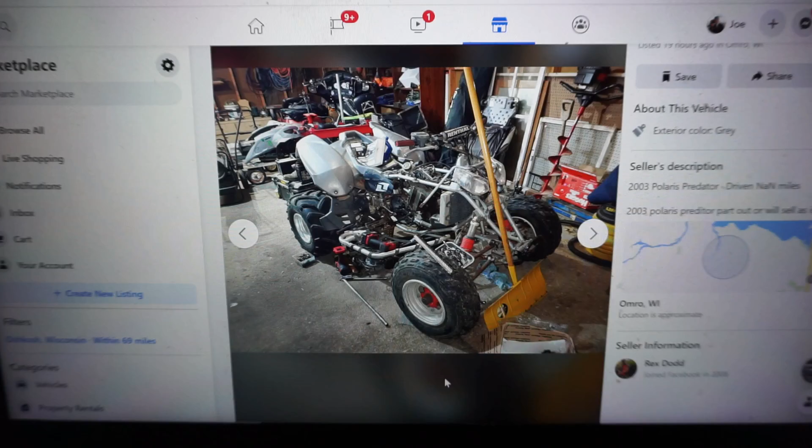This was up for a project. I just called the guy, and he said he'd take $800 for it. He gave me the rundown - basically he said he could not get it to fire. It turns over, has compression, and has spark, but he just cannot get it to fire. He thinks it's the timing. So we're gonna go check it out, see if it's worth buying, and give him the $800 if it all looks decent.

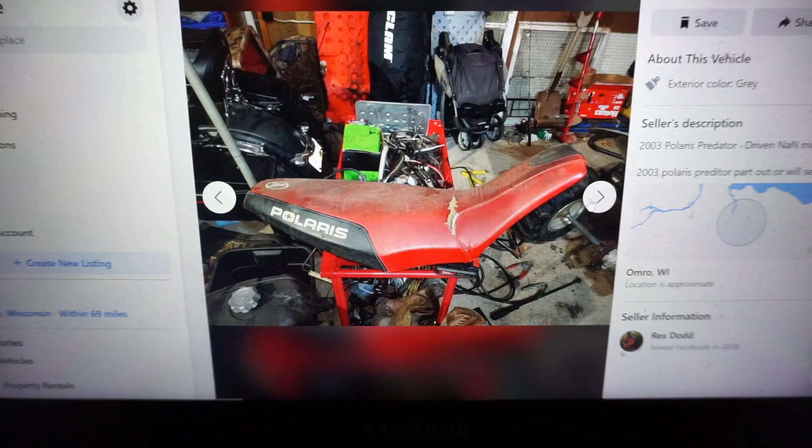You can see going through the pictures, it looks like it's all there. You can see he's got the clutch side off for some reason. There's an aftermarket exhaust on there, pretty nice one too. There's the seat for it - you can see it's kind of clapped out, but $800 is $800, we can work with that. And there's all the plastics for it.

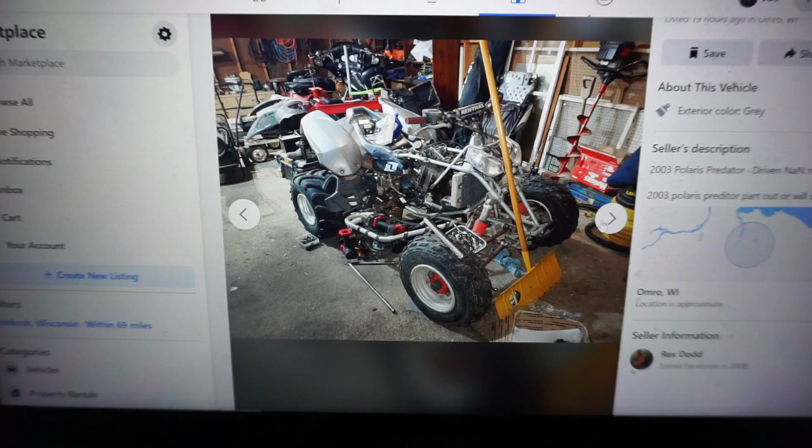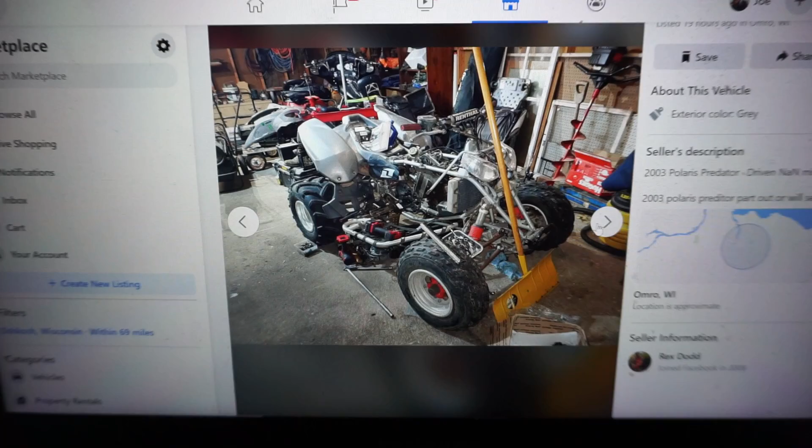So let's hit the road. It's right in Omro, so it's only like 20 minutes away from my house, which is perfect. We'll go pick her up and start working on it, see if we can get this thing fired up. I'm pretty pumped - usually these quads go for like $2,750, so we'll see if we can get it for $800. Stay tuned, should be a pretty fun project.

All right, the beast is back home. It was getting dark yesterday when I picked it up, so I didn't really film too much of it, but it's here, and she's a little rough, but not too bad. The guy basically told me he couldn't figure out the timing - that's what he thinks. It turns over, everything works on it, but it doesn't start. So today we're gonna be taking it apart and figuring out why it's not starting. I think it's the timing too - I think he messed up the timing, or the previous owner before him messed up the timing, and it never was right again.

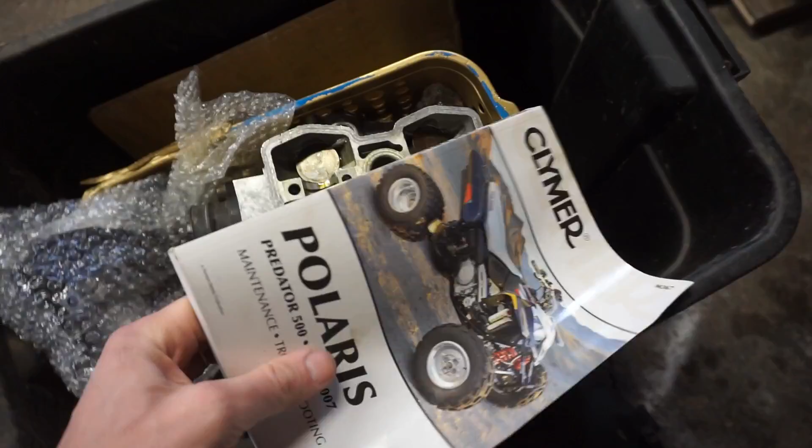These plastics are just kind of laying on here right now. The seat comes off, we'll put everything over here as a parts pile. This plastic comes off over here. Got that plastic piece off, and the gas tank just pulls right out of there like that. So it did come with the manual, and it comes with an extra head, an extra valve cover, extra cams and stuff like that, plus a couple gaskets in here. It comes with like everything to put it back together, so the pipe and everything like that.

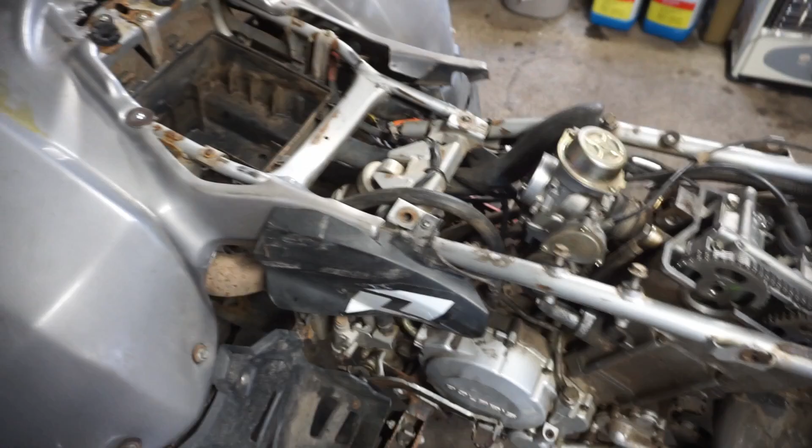It does have an aftermarket pipe on it - a Yoshimura off-road pipe. I don't know if those are any good. Let me know in the comment section if you guys run those and if they're pretty good, I'm not too sure, haven't really heard too much about them.

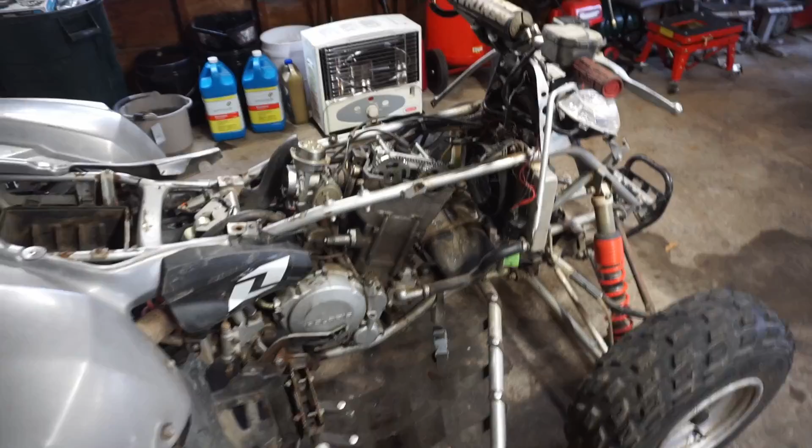We'll kind of quickly walk over the whole quad and check it out. It's got Nerf bars on it, I don't know if these are stock for it - I'm guessing they're not, not really sure what brand these are. I don't really see a brand stamped on it. They don't look like anything too fancy, but they do have them, which is nice.

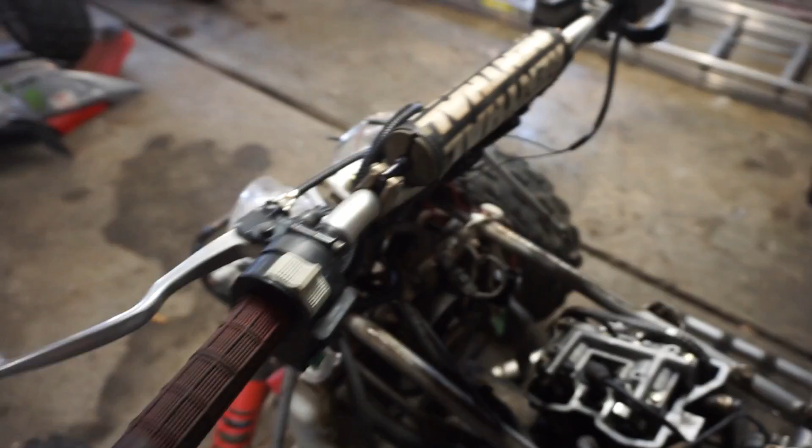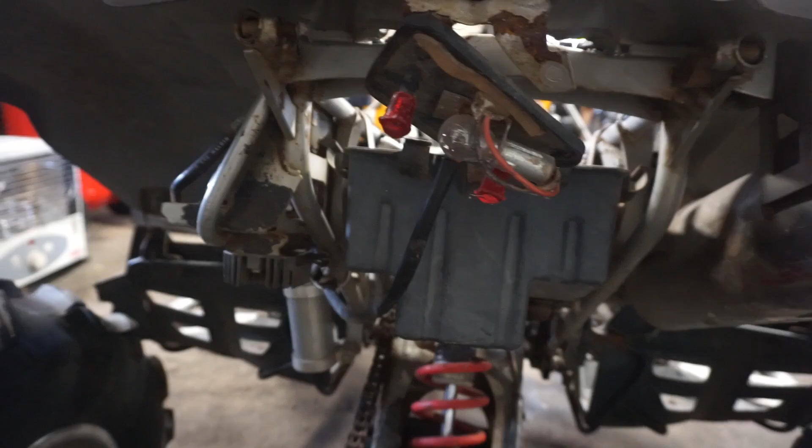It's got Renthal bars on it. I think that's basically the only updates to it. It does not have a grab bar, which is really annoying, so we'll have to get a grab bar if we can get this thing going - somebody must have taken it off or something. But the chain and sprockets are a little rusty, you can see.

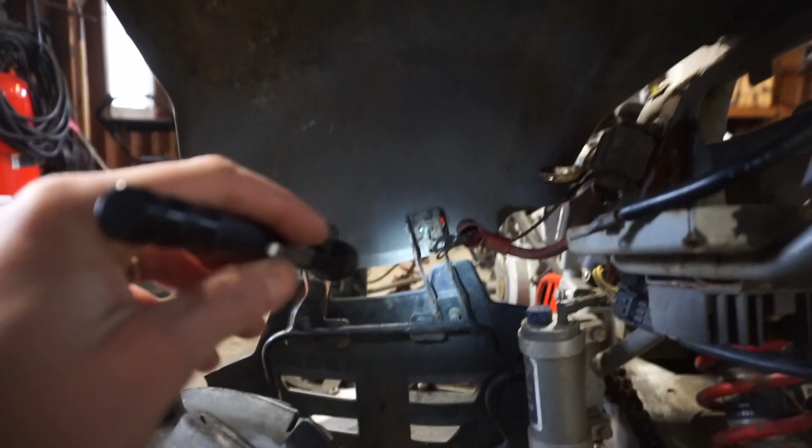We'll get the flashlight out so we can take a closer look at stuff. Chain and sprocket are really rusty. Suspension felt pretty good when I jumped on it. You can see all the plastics are kind of unbolted and everything, and yeah, the taillight's broken, so it must have crashed at one point.

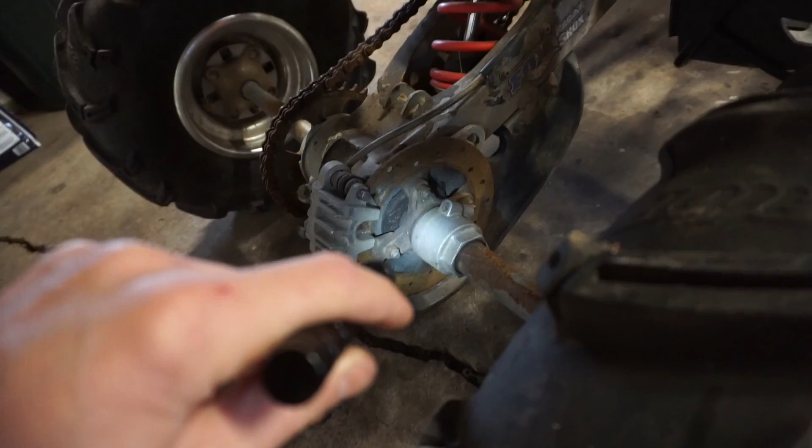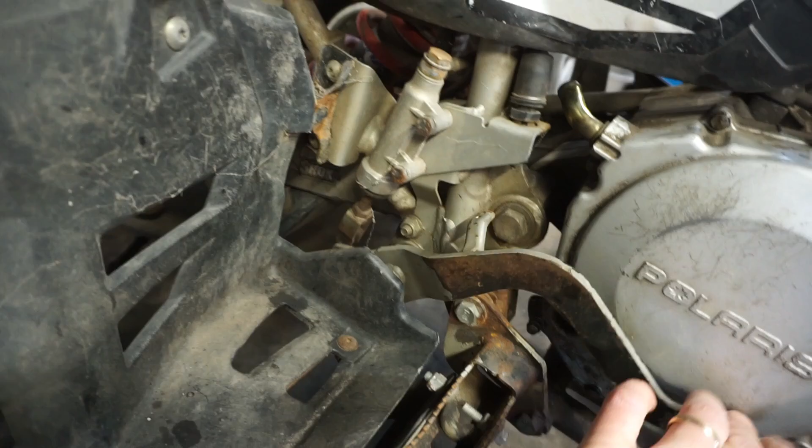Brake rotor is really rusty, got a couple rusty places on it. You can see the brake lever for the back - I don't know where... oh, that's... okay, that's working.

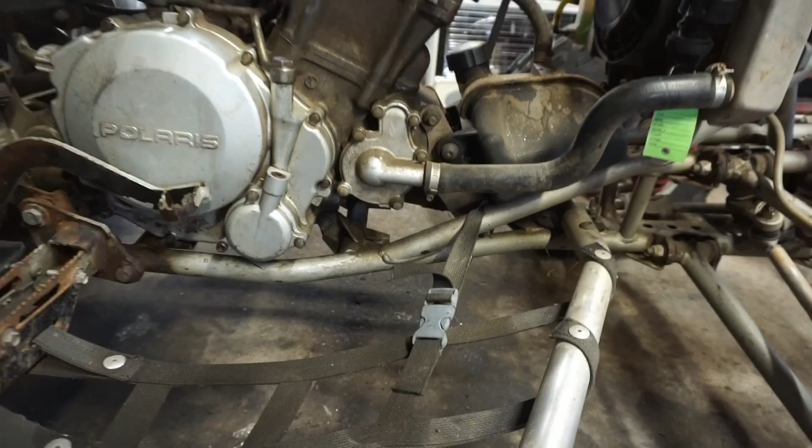It's got all the hoses from the radiator, and it's got the fan on there still. He said he updated, or not updated, but got a new ignition switch for it. I wonder if that was missing when he bought it.

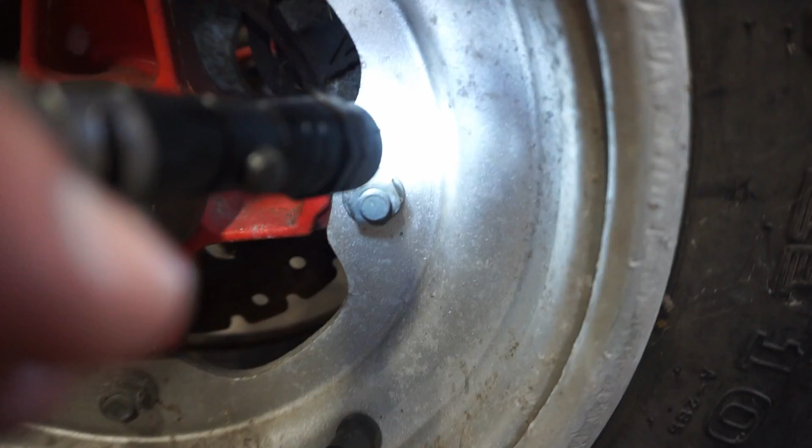Let's see what else, any aftermarket wheels on here or anything. Doesn't look like it, it says Yamaha wheels. So that's interesting, let's see what's on here. DID Japan wheels on there. So there's that.

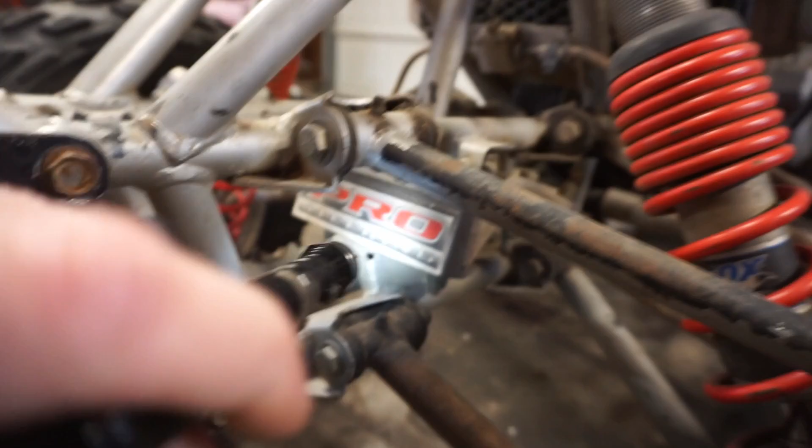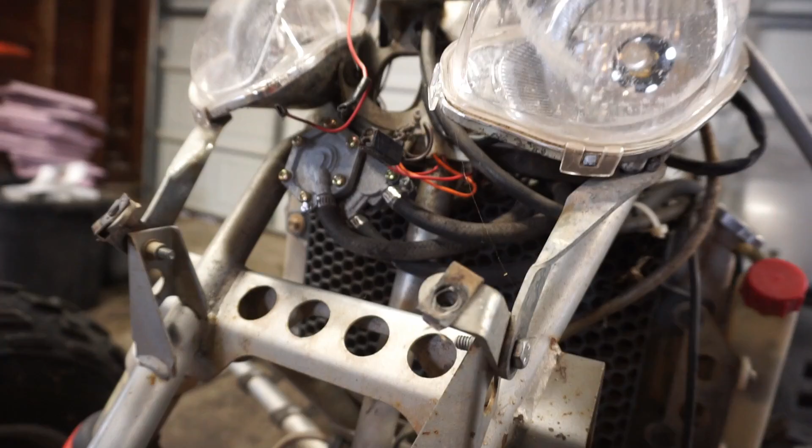It looks like it's got PR, it says Pro steering, I don't know if that's like a bearing. It says Fox racing shocks on them. Fuel pump's up here, I don't know if that works. The guy basically said he never had it running in 3 years.

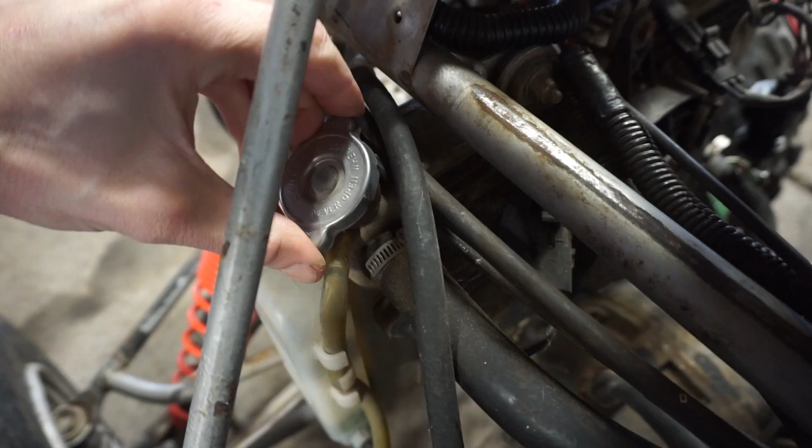So it will be interesting to see what we find wrong with this thing. Is there coolant in it? There should be coolant in it, right? If I can get the cap off. There we go, yeah, there's not really coolant in it.

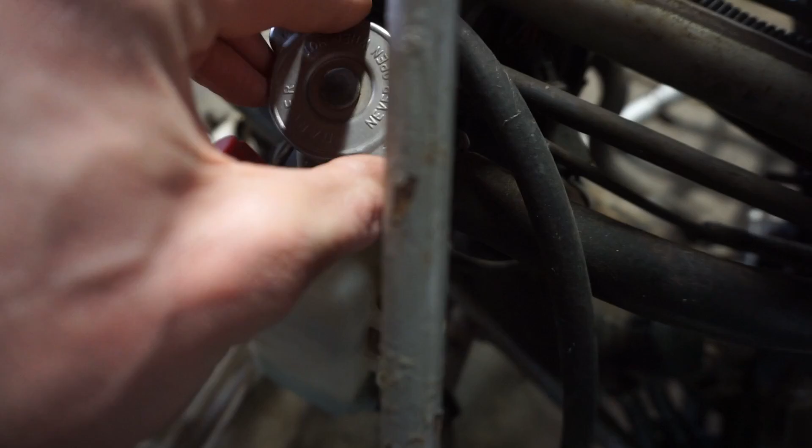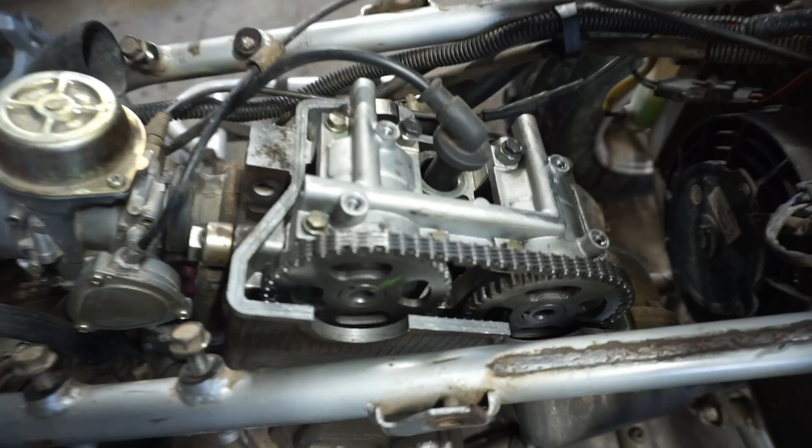And the oil is drained out of it right now because he had the clutch cover off, and he was trying to set the timing up here. So for the timing up here, I'll quickly walk you through what needs to happen.

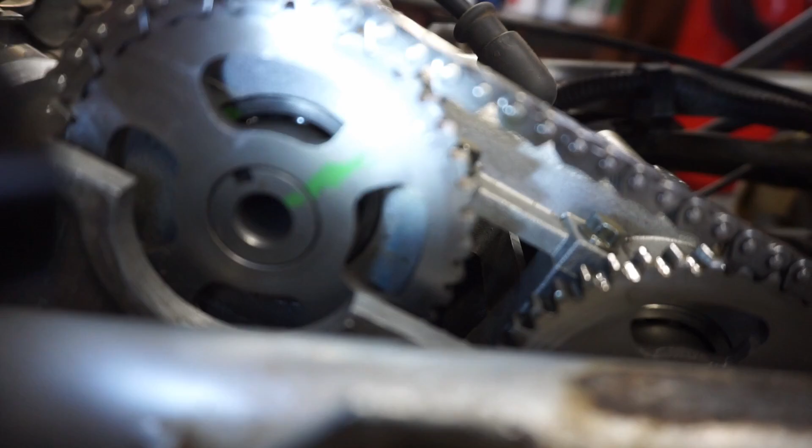There's 2 dots on these sprockets, on the cam sprockets. You can see there's one right there. See right here? That's one of them, and there's another one right here. These have to be aligned in a way that they're aligned at top dead center. One circle right here, one little circle right there, one circle right here, and one circle up there.

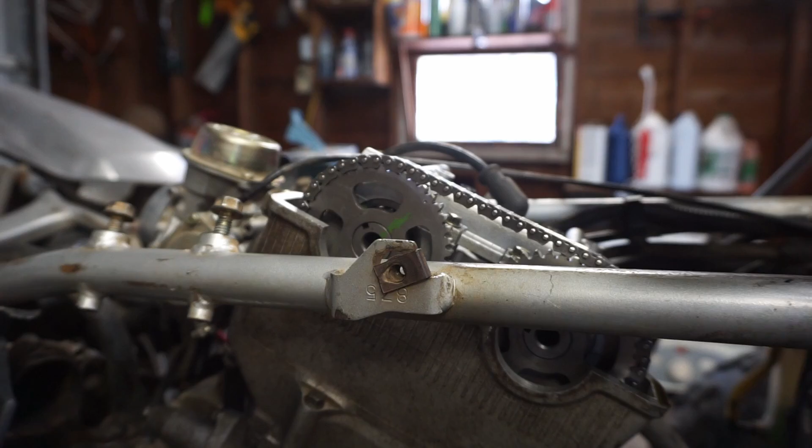And this cam chain's a little different, there's supposed to be 3 gold links. I've got the manual, I can show you guys this better in the manual.

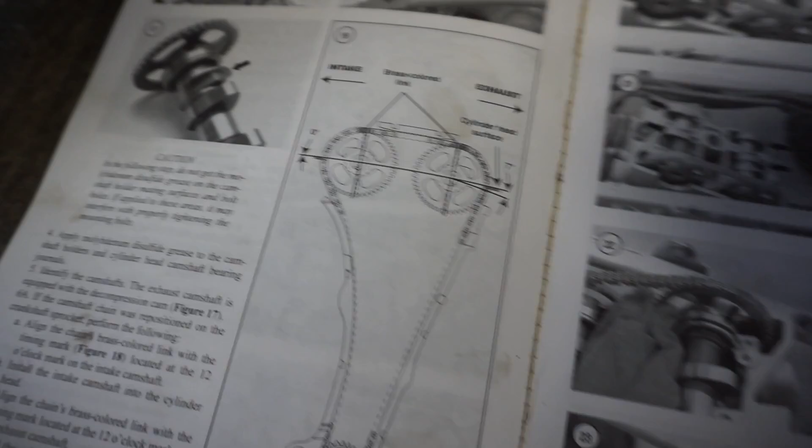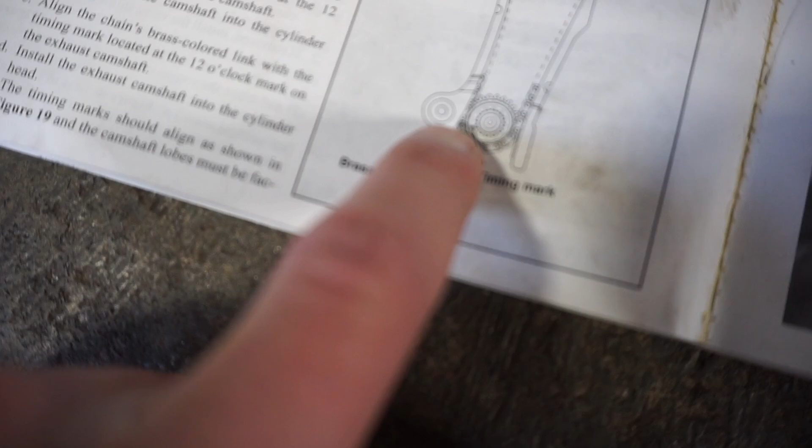So basically this picture right here, you can see there's 1 gold link right there, 1 gold link right there, and then down here is what he was trying to do. He was trying to get this gold link hooked up with that circle, and he said he couldn't get the bolt off to get that correct. So he thinks the timing was wrong.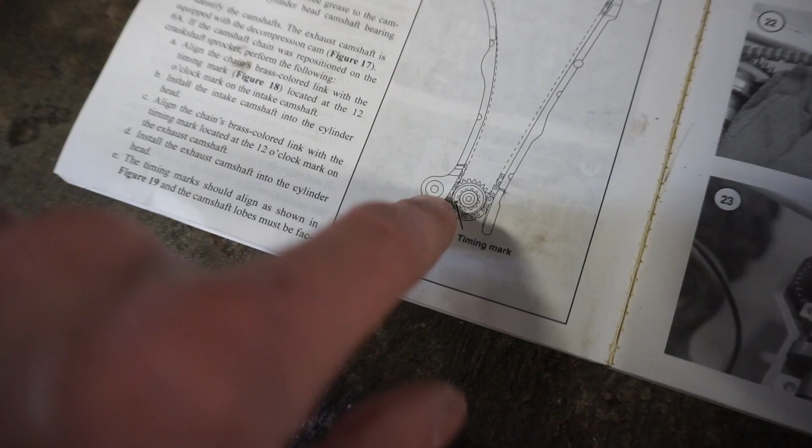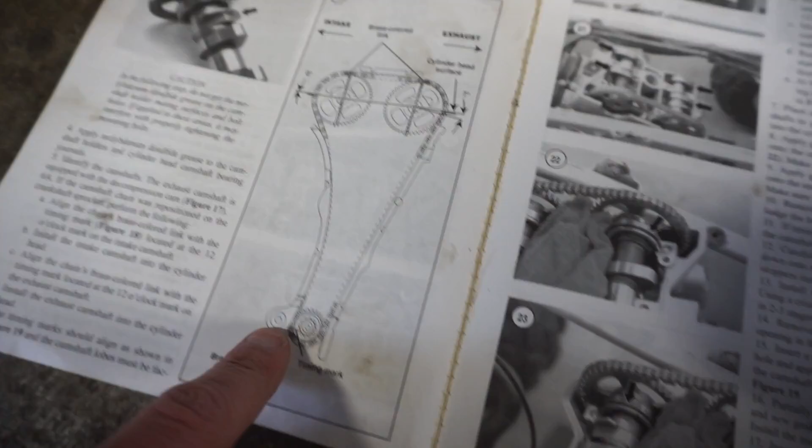This timing's a little different than the other 4 strokes, it's a little more intricate. You've got, like I said, the gold piece has to line up with the circle down here and up here. Usually this doesn't really matter down here, you just have to figure out the timing up here, which is easy. But since you have to work down here now, we have to go down into the clutch area, which is why the clutch was off, and try to get that to line up with that mark.

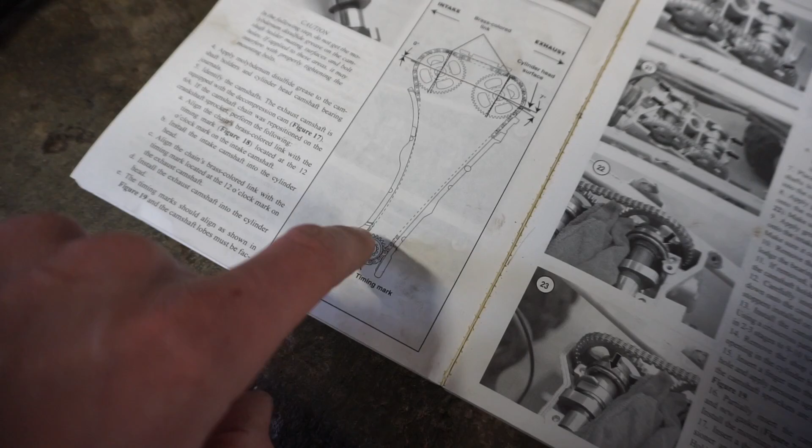There's a bolt covering that's really, really hard to get off. So what we're probably going to do is take a camera, stick it down there, see where that circle is, and then move the chain from up at the top. That's the plan, at least.

And these actually have a decompression release on the actual cam, on the exhaust cam. So if you look down here, I was checking to make sure that was in there. You can see it poking through right there. There's the decompression lobe, or whatever you want to call it. So that is on there, which is good.

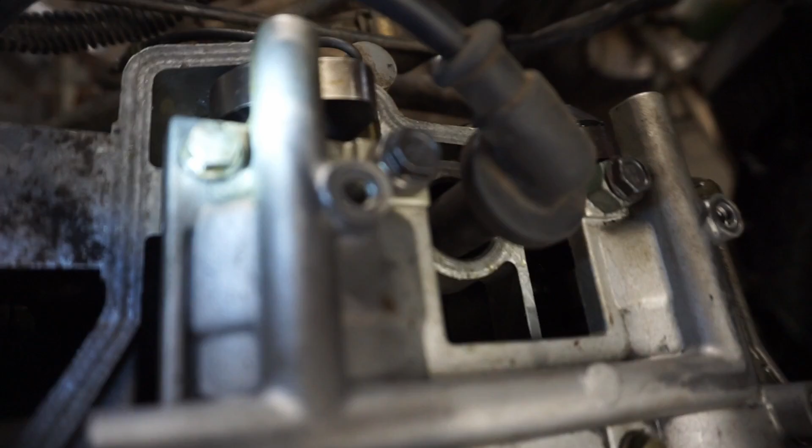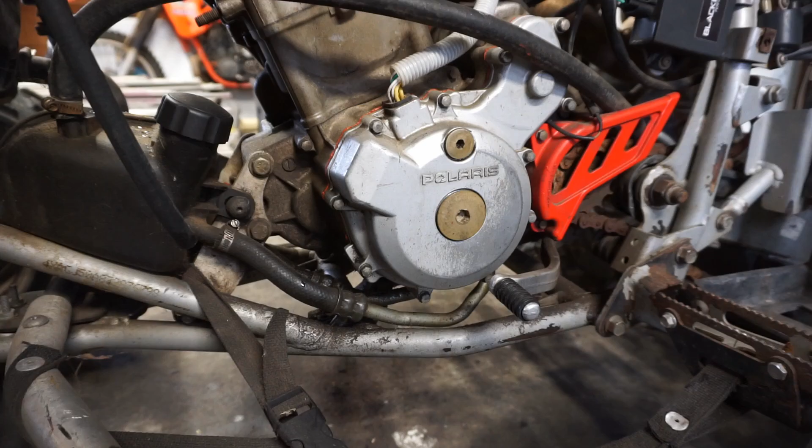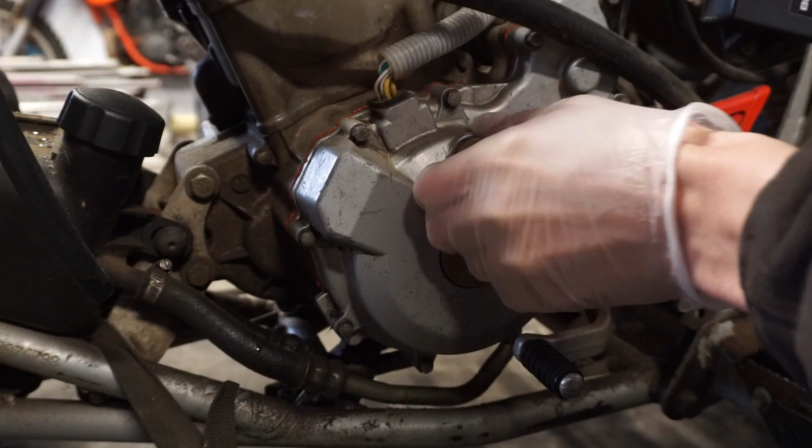Alright, let's start with the timing first. Let's just see where we're at for marks. This guy said that he had 3 people work on it, and none of them could figure it out. So if we can figure this out, that would pretty much be a miracle. So it's going to be very interesting.

Now what we're going to do is rotate this thing counterclockwise until the lobes are pointing opposite direction from each other, and then we should be able to see a T in here coming up pretty soon. Aha.

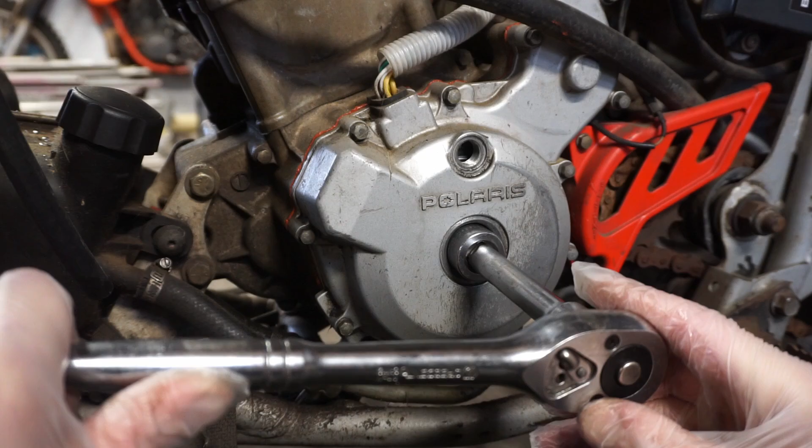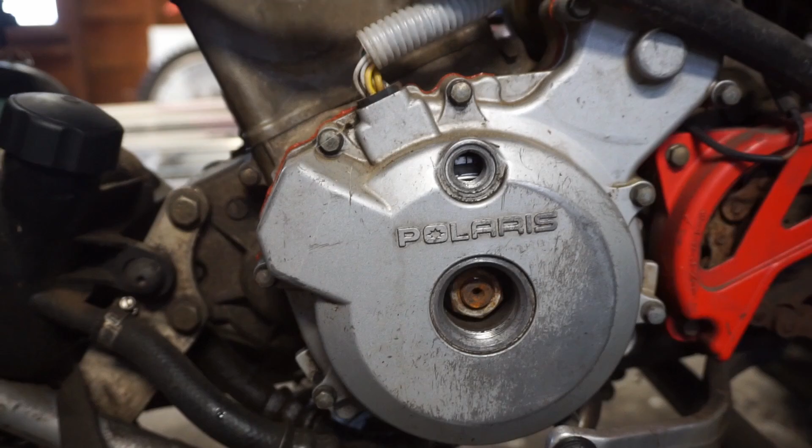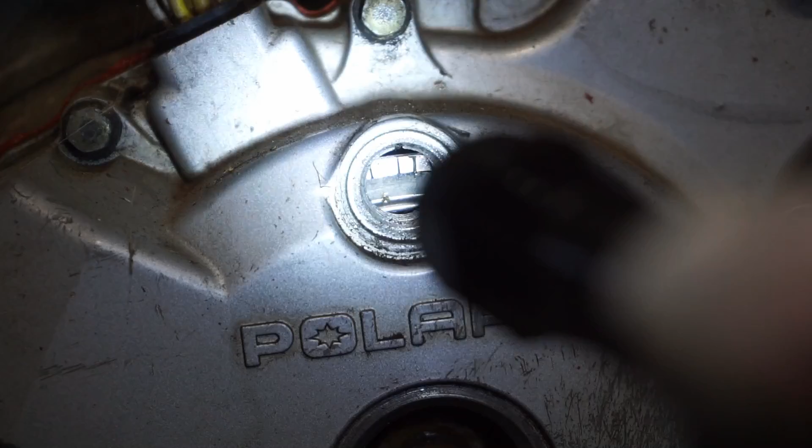Alright, right there, you guys can probably see this. I'll zoom in so you guys can see. Right in there, you guys look, you can see the T, and that's going to line up with this little notch right there. See how it kind of highlights it? Kind of hard to tell, but that's where we're lined up.

And you can tell if you're top dead center and not 180 out by looking at the lobes. See how this lobe's pointing that way and that lobe's pointing that way? That means you're at top dead center. So that looks good, he set those correctly. So the marks on here should be correct as well, and they look like they are correct. You can see there's a circle right there, a little nick in it right there, and a circle right there.

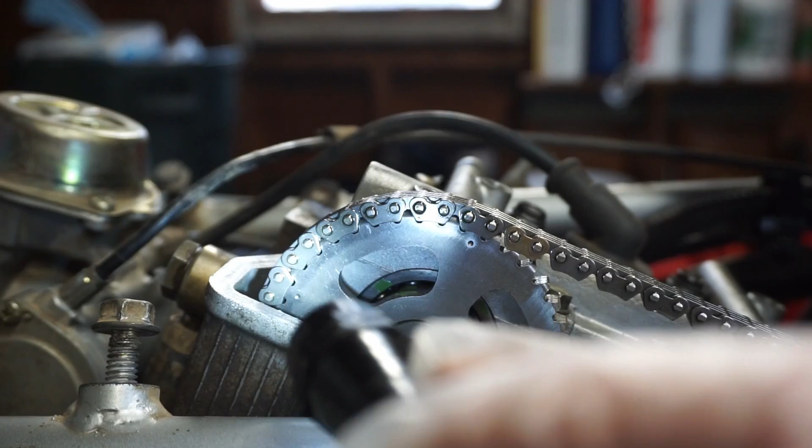And then on this cam sprocket, you can see there's a circle at the top right there, and a circle right there. So this guy lined it up perfectly, but it looks like the gold chain, see, look at, this is what I'm talking about, where it's gold right there. See how that one's gold? And then I don't know where the other gold one is, but that is where we're having problems.

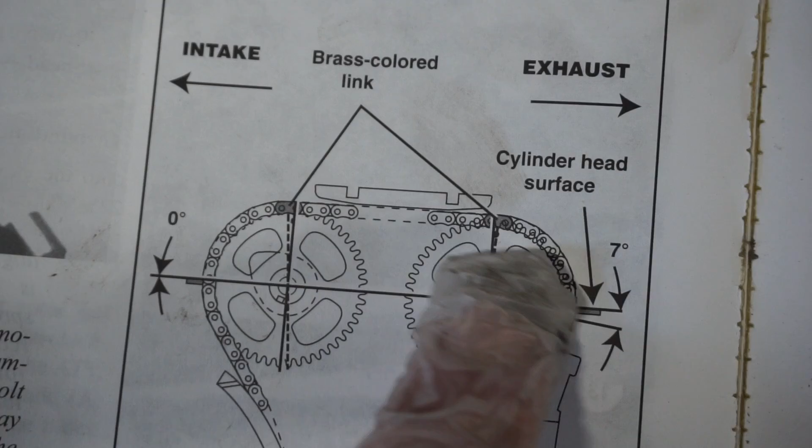So the gold chain is supposed to be right at the top of this thing. And then there's another one right there, and then another one down here. So we're missing this one and that one, because that one's not right at the top. That's supposed to be directly over that circle, like on the picture, and it is not.

So it looks like that could probably be the culprit right there. So we're gonna take off the clutch side cover and try to see what we can see for that sprocket down here. See if we can get like a little camera in there or something to help us out. But we need to take off the cam chain tensioner and move this chain.

But before we do that, let's just have some fun with it and see if we've got some spark before we start taking everything off this.

Man, there's some chunks of ice in there. I'm gonna get those chunks of ice out quick. It dropped down to like 9 degrees today. That's why everything's freezing. So must have been water in this thing at one point.

So that's not good either. A bunch of ice in there. We don't like ice and stuff. That's never good. Hook up a battery and see if this thing turns over.

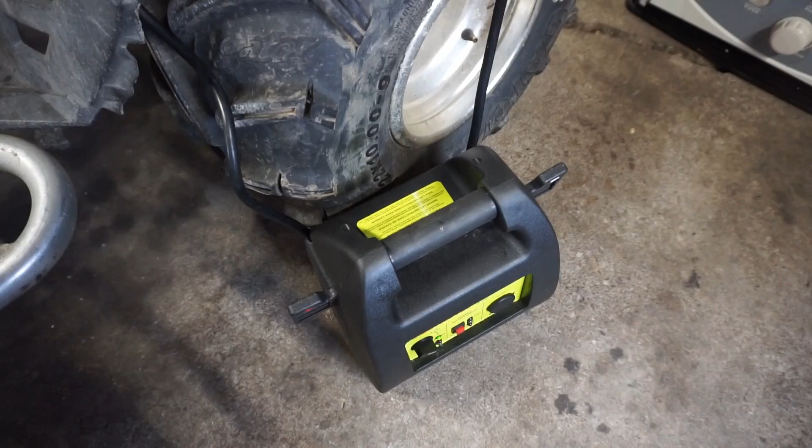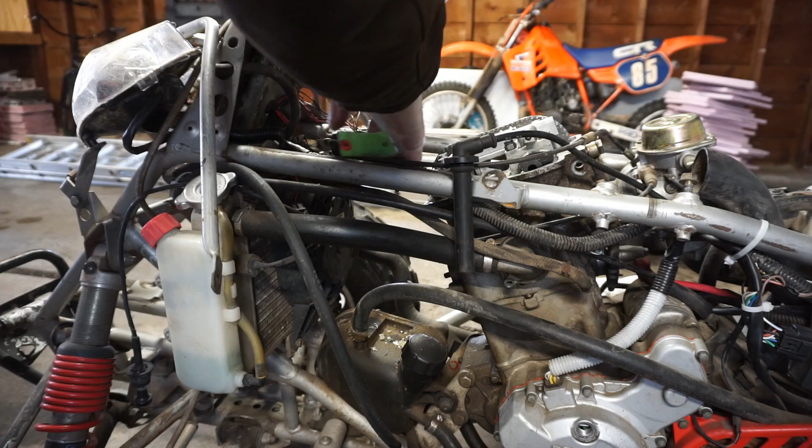All right, we got the battery jumper out. Let's try to turn the key on here and see if anything happens. Oh, the lights turned on. Oh, they keep on turning off. I think it's...

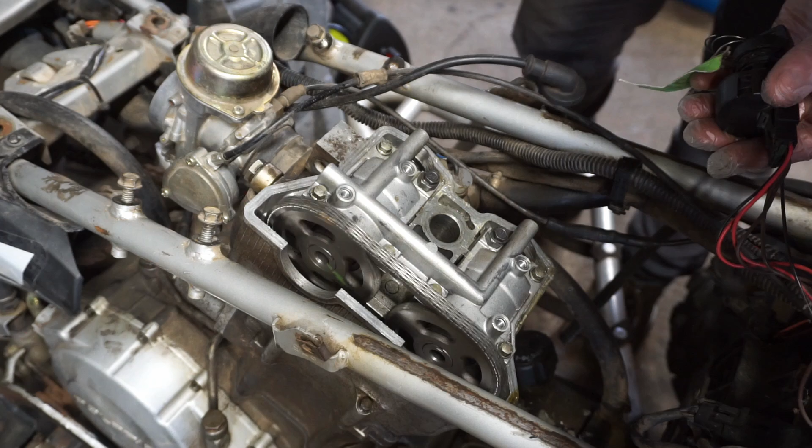Okay, I can hear something. Alright, let's see if this thing turns over, I guess. Alright, we're gonna quick crank this thing over, see what happens. Alright, cranks over. That's good.

Let's get that spark plug out of there. Then we should probably do a compression test as well. But there is a decompression valve in there, so I don't know. Probably won't get much of a reading for compression.

Well, we'll see if we get spark. Brand new plug, looks like. Alright, moment of truth here. We'll ground it to the frame.

I don't see anything. Probably not fast enough to crank it over. I have to get the battery from the DS650. Is it on? Looks like it's on. Must not be fast enough.

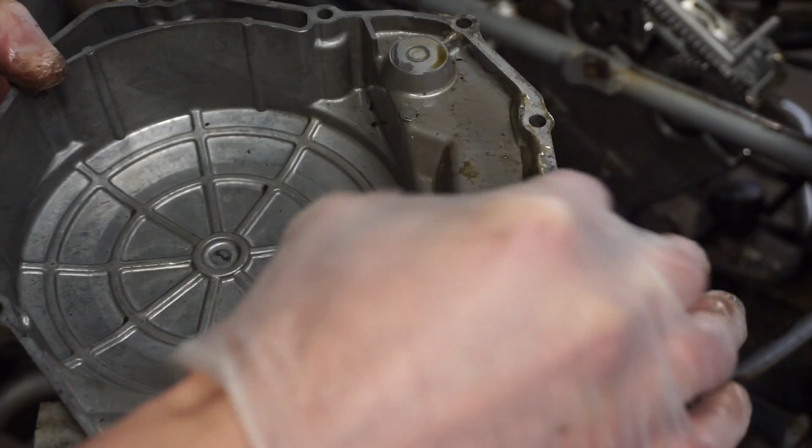So this is the sprocket that we're going to be looking at right there. We got to figure out where that little circle is in there and then get the cam chain to match up to that. That's the goal. So I think we need to take off all this stuff so we can get a better picture of it.

So clutch is coming off of this thing. All right, we got the clutch out of it right there. And now we can get access to cam chain, which is right there. So basically we just have to find that dot on the sprocket behind there, and we're good to go.

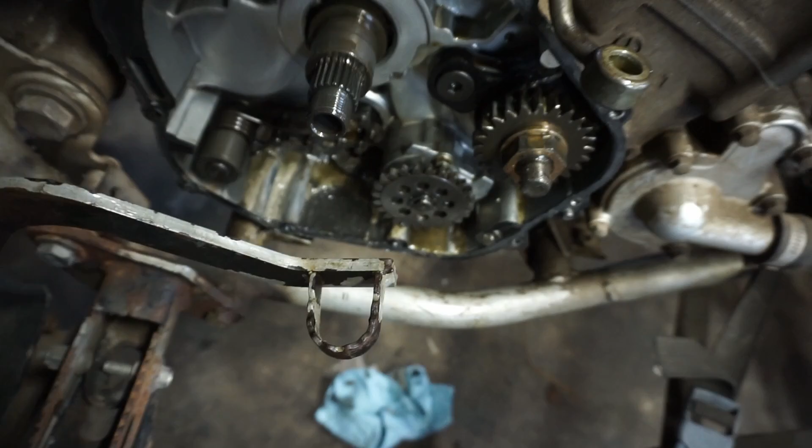You can see this thing once had water in it. You can see how oily the motor is right there, either from sitting outside or because it probably was sitting outside, because look at the top, there's water in the top too. So somehow this got water in it. I don't know if it was coolant from the water pump or what. But that's what that looks like in there. So maybe the water pump seal is bad. I'm not too sure. First priority is to get this thing started, then we can dig into it further.

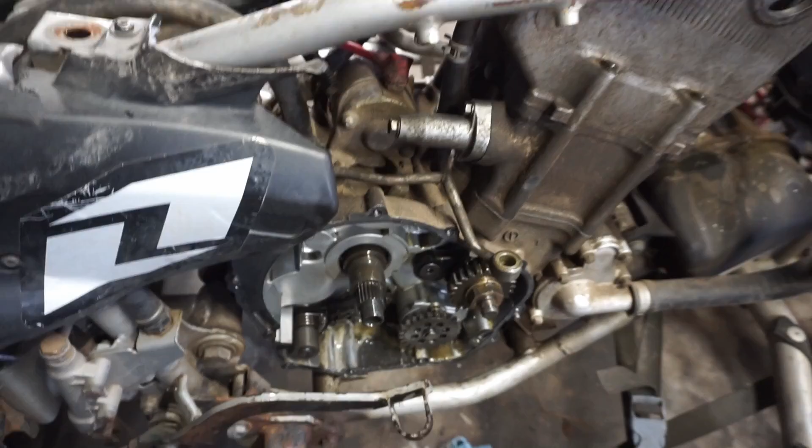But the clutch is over here and all the clutch components. Probably one of the easiest clutches I've taken apart. Basically clutch basket, clutch, and then the clutch plates. So there's not really too many extra parts that go in there, so it's pretty easy to remember how to put back together. But yeah, let's get out our diagram again. So this is what we're looking for, as a little circle.

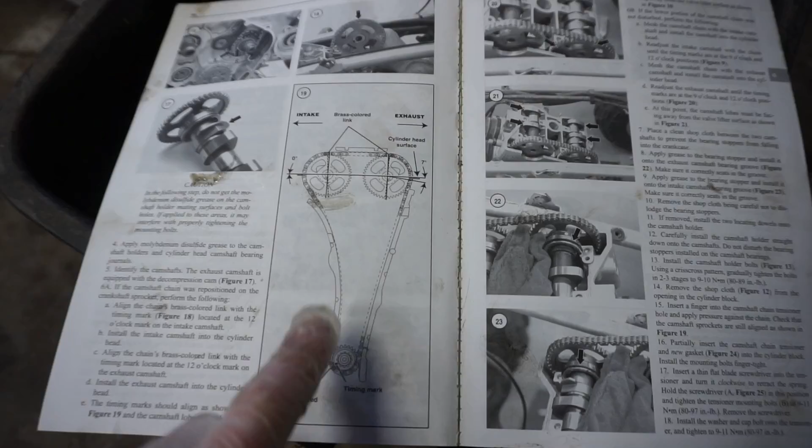I don't know if you guys can see that or not - a little circle right there that we have to line a gold chain up to. That's what we're after. I just thought of something: at top dead center, that sprocket should be in that position right there. So really all we have to do is get these gold chains to line up with these up here, and then this one should automatically be set. So let's do that, that's a lot easier than getting off this nut right here.

I tried cranking that thing off, it wouldn't come off. So I think if it's timed correctly and that sprocket's on there correctly and it's at top dead center, we should be able to time it just from up here. So let's grab the cam chain tensioner out of here and move that chain until those gold links line up with these two right here. Cam chain tensioner's just 8mm.

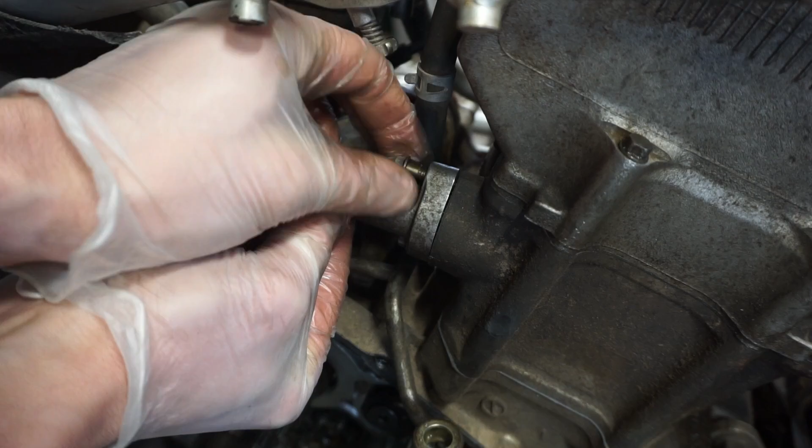It wasn't on too tight. Must have had it off before, a couple times probably, over the course of 3 years. Alright, cam chain tensioner's out. Chain should be nice and loose now. Alright, we're at top dead center right there.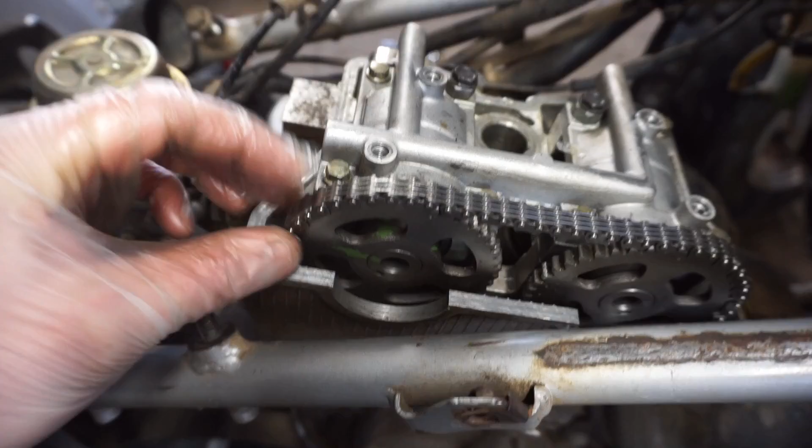That's interesting, because that sprocket's a little off right there. But we can move this chain now until we can get these gold pieces to line up. So let's move this chain up and just continue doing that until we find these gold pieces. All right, I think we're right where we need to be.

Now we can see we're at top dead center. I checked again - you can see the hole, the little mark, the gold chain, hole, gold chain. I think we're perfect now. So that one should be lined up down there automatically.

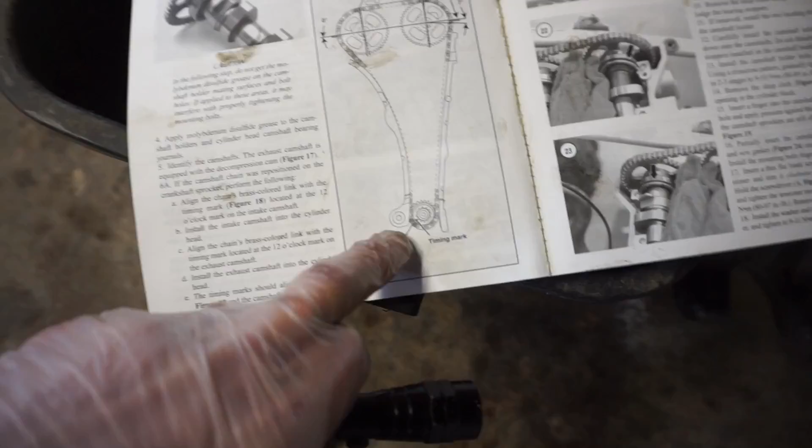And if we look in here with a flashlight, let's see if we're close to where we need to be. We should be able to see a gold chain popping through down here, maybe not, it's way down there. So we're gonna look and see if there's a gold chain. Oh yeah, look at that - the gold chain's right there, right where it's supposed to be. Awesome, that's sweet. All right, let's put everything back together.

I ended up having to take out the cams and everything to get that chain to move, and then the cam holder. So we'll put everything back together and put the battery from the DS650 in there, crank her over, see if she starts. This is exciting, this is very exciting. Hopefully it doesn't have low compression.

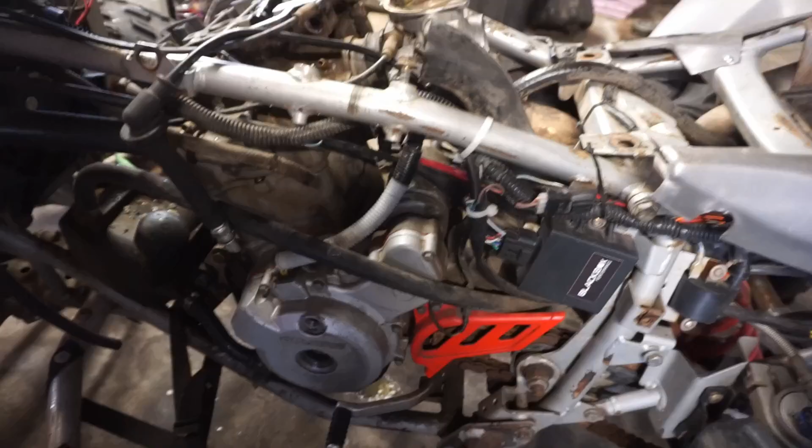All right guys, so I spun over the engine and it got stuck. I looked down the spark plug hole and at top dead center, the piston was really far down in the cylinder. I spun it around thinking I was 180 out, and it was still really far down in the cylinder. So I'm thinking the flywheel is on wrong. The guy said there was flywheel work done to this thing, so I wonder if somebody put the flywheel back on wrong. And yeah, it's not top dead center - there's no way, it's really far down in the cylinder.

Even when it's way past the T, it's still really far down. So it's way off, almost like 180 off. I don't know what happened to the flywheel or what's going on there, but something is definitely off on this. So we're gonna take off this cover and check it out because something is not right.

All right, we got the stator cover off. So right here is where the timing mark is, you can see the T is right here. It should be at the top, right up here where the window is, and it's not. So I'm thinking whoever worked on this messed up the flywheel, and it's really like 180 off. It's supposed to be like right here, and every time I rotate it, it ends up right here.

So we're at the top, you can see the piston through there right now. I don't know if you guys can see that - piston's right at the top. And every time I rotate it over, those timing marks end up right there, and they should end up right there. So we're gonna try to get the flywheel off.

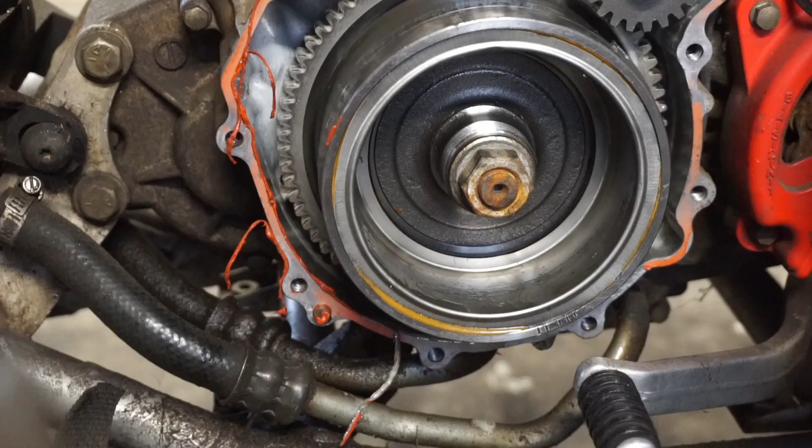I think we need a special flywheel puller for that which I don't have, but we can try to get this nut off and see what happens, because I think somebody bolted the flywheel on incorrectly. It looks like the flywheel has to line up correctly due to the keyway, the little Woodruff key. I'm guessing the little key that's supposed to go between the crank and the flywheel is sheared off, and that flywheel is just in the wrong spot. That's my prediction. So let's take off that bolt if it comes off and take a look, because I'm pretty sure that's what it is.

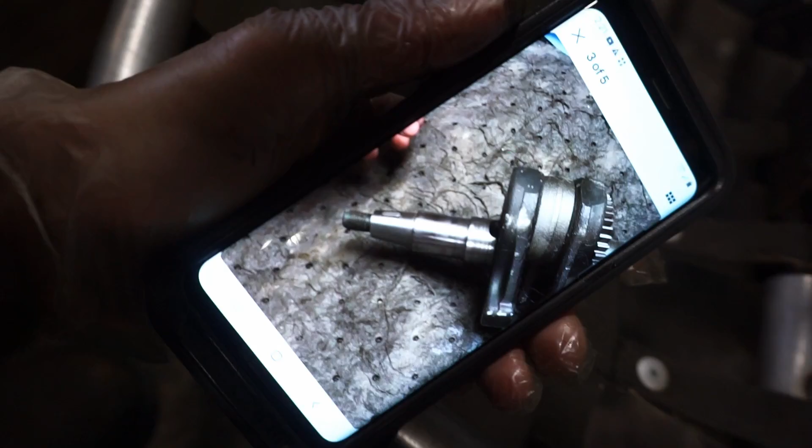Check it out. Here's a picture of what the Polaris Predator crank looks like, and you can see the key on it right there. It's hard to see, sorry about this. You can see the key right there. See how it doesn't go all the way to the end of the shaft right there?

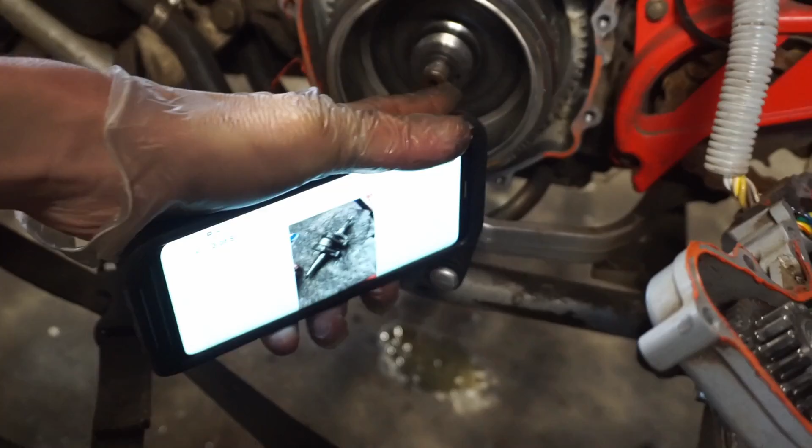So I'm guessing somebody pounded it on there and didn't line up the key and the crank, and just kind of pounded it on there and it was tight because that key is poking up like that. That's just my guess. So what we're gonna do is get a puller and take off that flywheel and see where that key is, because it has to be wrong. It just has to be wrong. It's almost like that key needs to be all the way over here, that's how far off it is. So either it sheared off and slipped, or somebody pounded it on there wrong and just left it like that.

So I guess we will order up the flywheel puller and continue our process. It will be interesting to find out what we find, and that's probably why it didn't start up. The guy was really close with his timing, and it should have at least popped over. It's this flywheel causing problems, messing up all the timing.

All right, so we got the flywheel puller ordered. It was like 25 bucks on Amazon, should be here in a couple days. Until then, we can't really do too much. We can't really do the top end because we need to time it in order to do the top end.

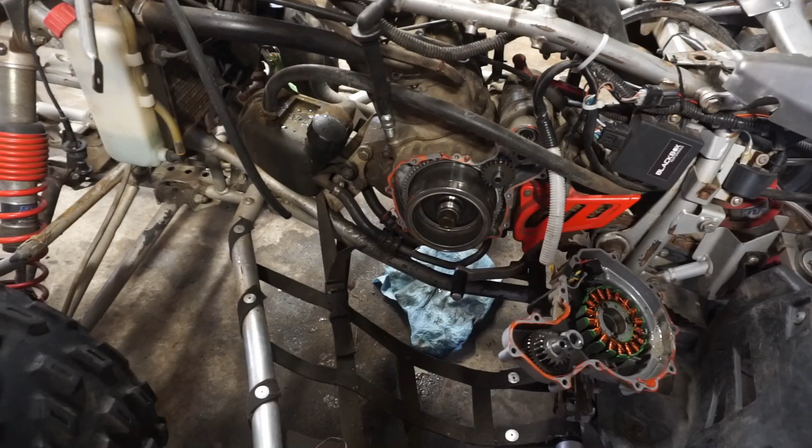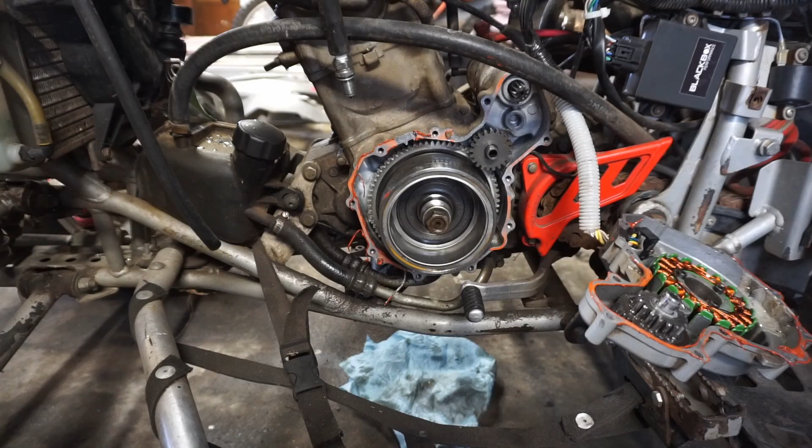So yeah, basically this thing would never run if it was like this. Hopefully, I mean, it has to be that key. I don't know what else it could be that's making it off time. It's definitely got to be that keyway in there, or something's really messed up with the flywheel. I've never run into this problem before where that key is messed up, so that's just giving me some false hope there. But I'm hoping that's the thing, because I rotated this thing over to top dead center about 100 times just to make sure I'm not going crazy here and that I'm actually right about this.

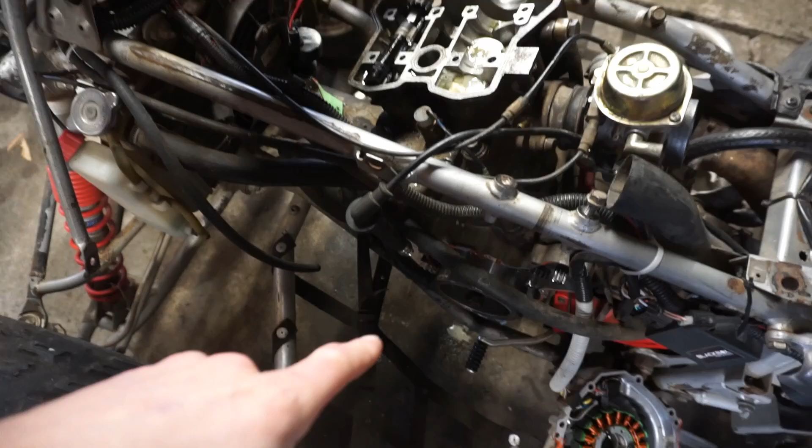But yeah, we got a lot done. We figured out how to time this thing. So once we get that done and get the new keyway in there, we can time this thing and it should fire right up. I think the carburetor was cleaned on it recently, so we don't even have to touch that.

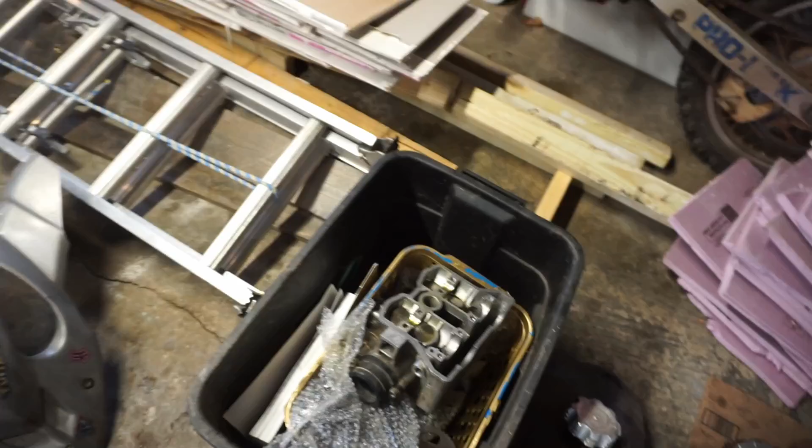Then just to kind of piece this thing back together, I think we need an air filter for this as well. I'm not sure if there's one in the box or not, I didn't really look too closely. There is a box down there, and I think the air filter is in there. So we don't really need too much other than what we have.

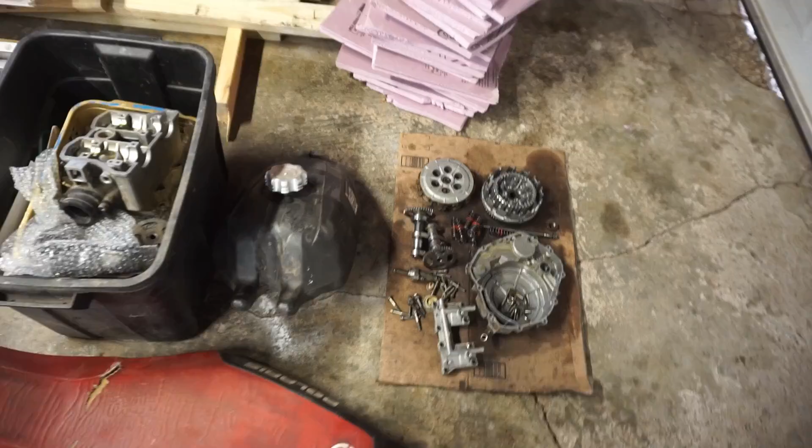The clutch basket looks pretty good, didn't even look at it. I was too focused on the timing, but that looks pretty good, not too worn or anything. And then the clutch plates looked pretty good when I took them off. So I think everything's here, we just have to wait for that key.

Then looking in here, it looks pretty decent except for the water and the oil, which we have to solve that problem too, which could be the water pump right here. Or it could have just gotten water in it from letting it sit outside. I'm not too sure.

But yeah, basically waiting for that part, and then we can piece everything back together and hear it run. So stay tuned for part 2 on this thing, coming up in a couple days. Should be pretty exciting, we'll see what we find.